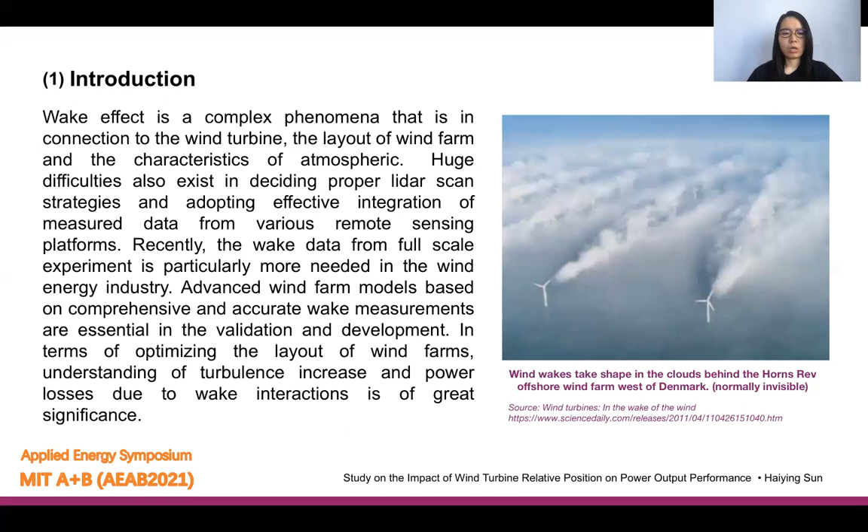To estimate the wake effect quickly, some simplified wake models have been developed. Here we demonstrate several commonly used wake models. These models are pretty simple, but they all have limitations, and they cannot simulate the three-dimensional distribution of wind speed.

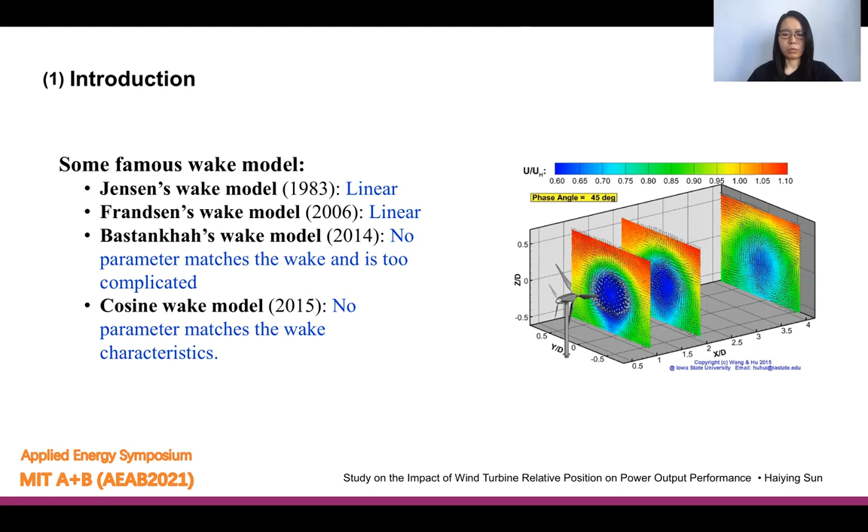To investigate the influence of relative positions of wind turbines on power output performance, a more advanced wake model is necessary. Therefore, this study first develops a 3D wake model and then investigates the impact based on this wake model. In the second section, a novel 3D wake model developed by our research group will be introduced.

Most wind farms cannot produce as much power as they were predicted, caused by inaccurate wake models and inefficient wind farm prediction tools. The linear wake model assumes the wind distribution at any downstream distance is the same. Based on the linear wake model, a 2D wake model was developed, which can estimate the Gaussian-shaped wind speed in the horizontal direction. However, these wake models cannot consider the wind variation in the vertical direction.

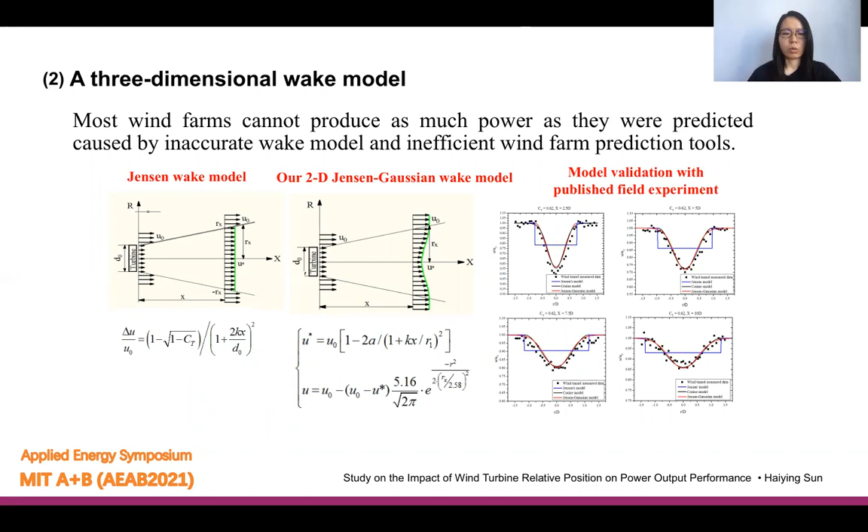Continuing the aforementioned study, a novel analytical 3D wake model has been presented to help describe the wind distribution in space at a wind farm. The wake model is based on the momentum conservation theory and assumes that the wind deficit is Gaussian-shaped, and the wind velocity is continuous at the wake boundary.

It can calculate the wind velocity at any spatial position with high accuracy and little computational cost. The wake model considers the height direction's influence, which makes it more advanced than other analytical wake models. The expression of the wake model is demonstrated.

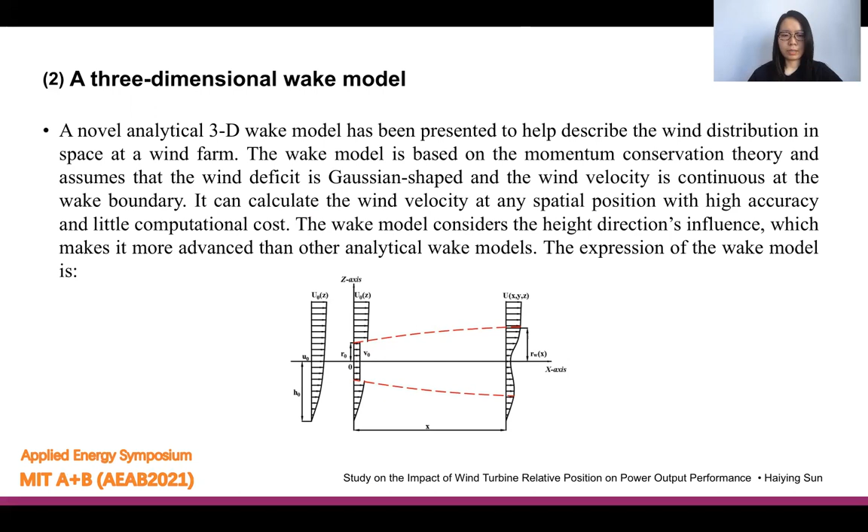There are 3 assumptions in the wake model. The first assumption is that the wind velocity deficit at downstream distance is Gaussian distributed. The second assumption is based on the momentum conservation theory, and it means that the flow flux is conserved in a specific area at any wake section. The last assumption is that the wind velocity is continuous at the wake boundary.

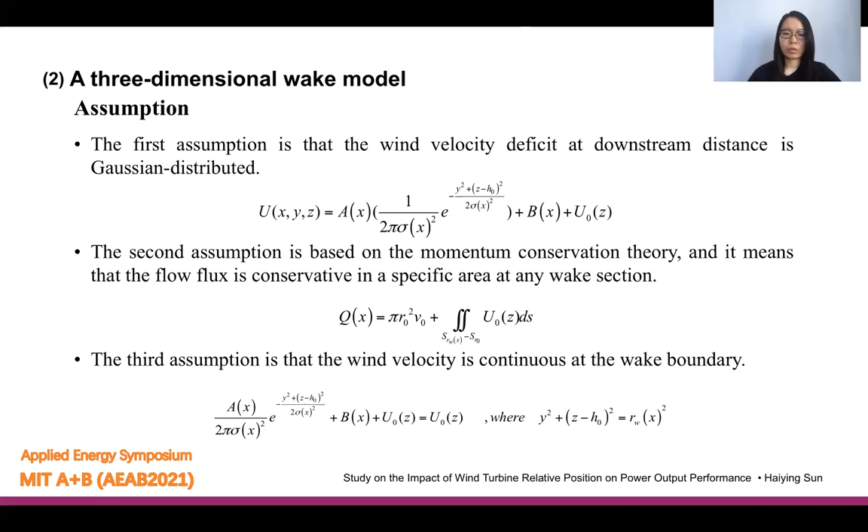In the next section, I will introduce the impact of downstream distance, horizontal distance, and hub height of wind turbines. In the following part, 2 adjacent wind turbines will be taken as an example to investigate the impact of hub height change of one wind turbine on another wind turbine.

Changing the downstream distance between 2 wind turbines has no influence on the upstream wind turbine, but may improve the power performance of the downwind one. Due to the wake effect, the equivalent wind speed of the downstream turbine is much smaller than that of the upstream one.

At the original hub height, the equivalent wind speed increases from the 385 meter downstream position to the 1,540 meter downstream position. If increasing the hub height, the equivalent wind speed will also increase significantly. The effect of downstream distance on power is similar to that on equivalent wind speed.

At a certain hub height, the increase in the downstream distance can increase the power to a certain extent. However, when the wind speed is larger than the rated wind speed, the power performance will not continue to improve. With a higher hub height, the downwind turbine can reach the rated power at a relatively close downstream position.

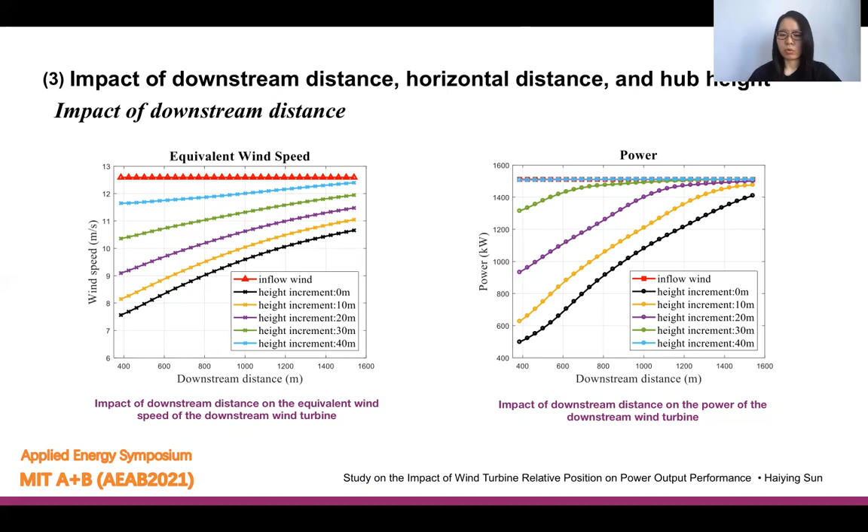Changing the horizontal distance is another way to improve the performance of the downstream wind turbine. It is clear that increasing the horizontal distance will lead to an increase in equivalent wind speed, as the effect from the upstream wind turbine can be avoided. For a higher hub height, the turbine can have a larger equivalent wind speed at the same horizontal distance position.

When the hub height increases to 40 meters, it only needs to move 40 meters horizontally to avoid the influence of the wake effect. For the power output, at the lower hub heights, increasing the horizontal distance can significantly increase the power output. For example, at the original hub height, the power at the central position is only 500 kilowatts.

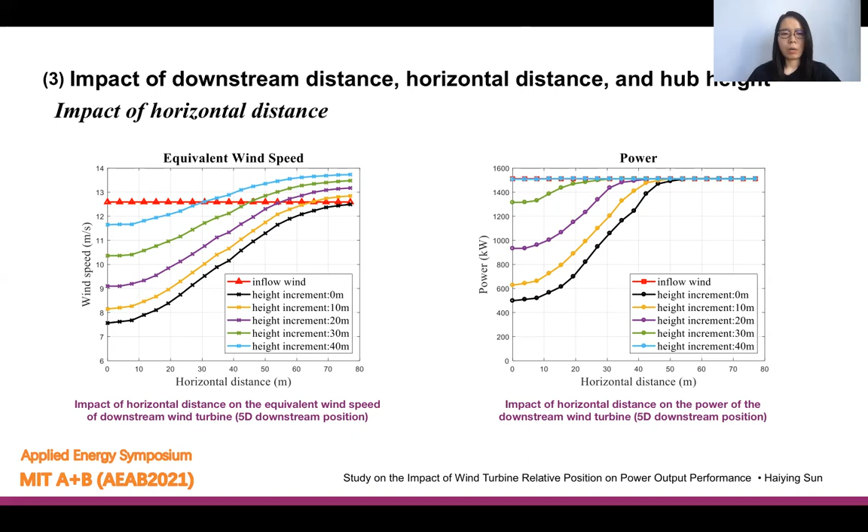As the horizontal distance increases to 55 meters, it quickly increases to rated power of about 1,500 kilowatts. Well, when the hub height is larger than 40 meters, which may be different in other cases, the power output performance will not continue to improve.

Changing the hub heights of either the upstream or downstream wind turbines may help improve the power generation. Changing the upwind turbine will have a significant impact on both itself and the downstream wind turbine. The downwind turbine has the smallest equivalent wind speed when it is fixed at the same height as the upstream one. The wind deficit is maximum at the hub height.

Therefore, no matter increasing or decreasing the upstream hub height, the wake impact on the downstream will be reduced. This phenomenon is especially noticeable when the two turbines are close together. The impact on the power of the downstream turbine is even more pronounced.

At the 5D downstream position, the power could be improved from 450 kilowatts to 1,330 kilowatts. While at the 10D downstream position, the power output can be improved from 830 kilowatts to 1,400 kilowatts. One thing to note is that moving the wind turbine at a certain height may cause different impacts on the power output.

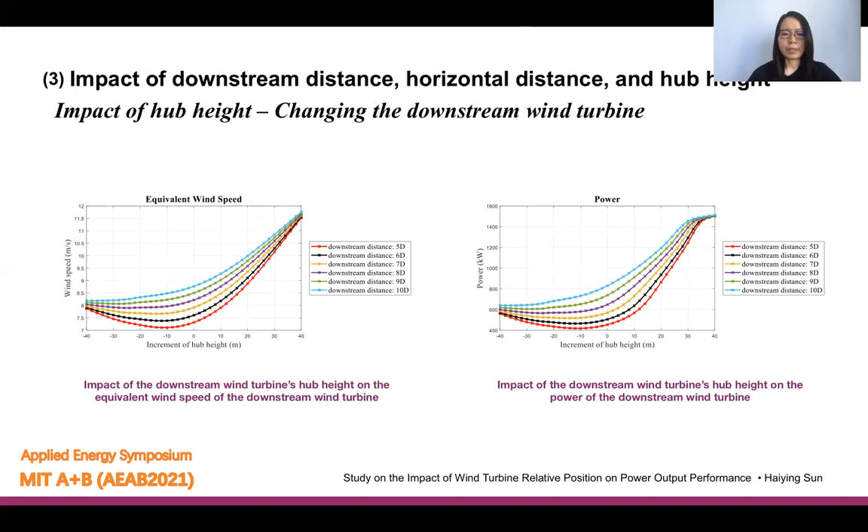In the next section, the main conclusions drawn from this study are summarized. Firstly, an engineering three-dimensional wake model is introduced. The wake model has high accuracy and can quickly predict wind speed at any downstream position and at any height. Secondly, the hub height and the layout have a significant impact on the wind speed and power performance of its own and its downwind wind turbines.

For two wind turbines, increasing the relative distance in downwind direction and horizontal direction can both avoid the wake impact on the downstream wind turbine, thus increasing the wind speed and power output. Special attention should be paid when changing the hub heights of wind turbines. Increasing the hub height is definitely beneficial to power output, but decreasing the hub height may have different results.

The influence from wakes can be reduced, but the equivalent wind speed will be decreased as well. Finally, overall, the influence should be evaluated according to the specific hub height increment and relative downstream distance.